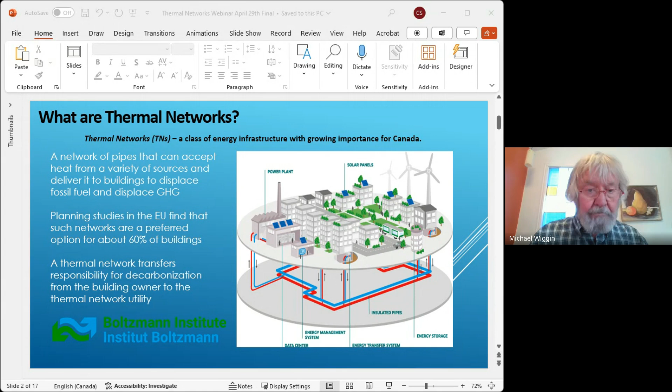Okay, thermal networks. Just a picture of them. These are quite different than the older steam systems done years ago, where they had to have tunnels underground for the steam pipes, things like this. Now with pre-insulated pipes, they're able to bury them only about 2 feet below the surface, about 60 centimeters. And the worry is structural protection. The heat loss isn't an issue.

The insulation's so good. So to cut into a road or a sidewalk and put these pipes down, they're usually above all the other utilities, water, sewer, and so forth. And so you can often go above other utilities and put them in without too much difficulty.

I showed a few pictures for smaller diameter, in fact, from about 100 millimeters and less. They're now supplying with PEX pipe, so corrosion isn't an issue, and they can supply them in rolls, as shown in the picture there. So places like Oujé-Bougoumou, a community I work with that's had district heating since about 1992, most of their piping is of this form, coils of PEX pipe installed by people within the community itself.

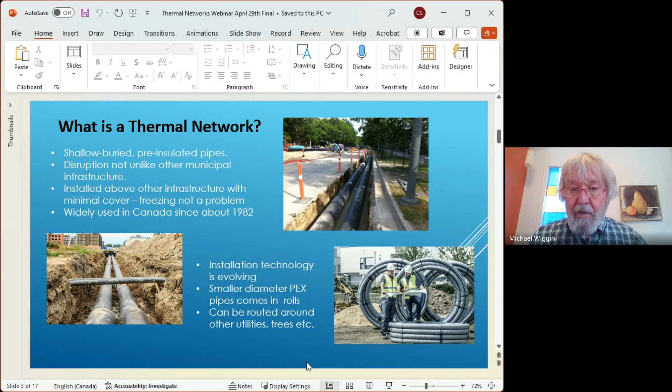Okay. Now, often we get into arguing details of one method versus another, but I think it's really important to come back and focus on our common ground. All of us, I think, are concerned about climate change. It's very evident now. All the climate scientists are behind it, and we are seeing the risk through forest fires, flooding, derechos, major storms, hurricanes. It's very evident we're on this path.

So now we've got challenges. We do have to reconcile these climate change concerns and the need to eliminate greenhouse gas emissions. And at the same time, we're talking, for economic reasons, about expanded fossil fuel production. The world still needs a lot, and so our economy benefits. Anyhow, we've got to reconcile that. We can't keep burning fossil fuel and mitigate climate change at the same time.

Now, the next thing I'd like you to think about is that when we talk of energy, everybody talks about the cost of making energy, whether it's solar or wind or anything. And they talk about the amount of energy used. Now, it's often easy to balance the seasonal output of solar collectors, let's say, with your seasonal heating demand. But what about the peak?

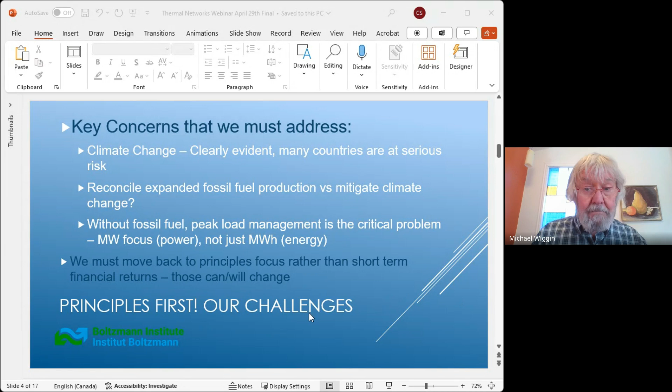Next. Yeah, okay. So as I said, I'm going to show you some of the stuff that me and my colleagues have been working on, but I mainly want to get some discussion so we can work together, all of us, on developing a common understanding of how to move forward. So I identified some of the major challenges, but now let's look at an integrated way of getting there.

Building heating, I'm going to focus on that because it's a really big issue. It's about 20% of our greenhouse gases nationally, and about 70% of the buildings that are doing these emissions are still going to be here in 2050. So while we are making a lot of progress on net zero passive house design for new buildings, we've got a lot of buildings that are here now and they're still going to be here in 2050.

The other thing is the rate of deployment of our housing retrofits is not really going to get us to this target. It's going slowly. And what people are finding is as you push beyond the initial reduction in greenhouse gas, the cost for existing buildings starts going up quite sharply. And then the other thing I said, some of our solutions are counterintuitive. As a building owner, the most obvious thing to do today might be to put in a heat pump.

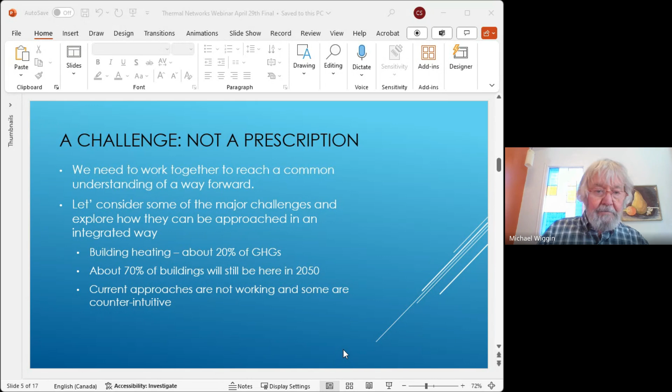Okay. If you're not familiar with it, I'm going to use load duration curves a bit in this presentation. If it doesn't make sense to you, imagine taking your hourly heat load during the year and look at a plot of hourly heat load, and then take those hourly heat loads and rank them from the highest to the lowest. And then you will get something called a load duration curve that looks like the blue curve.

So the peak is very, very high, but for a very short time, the 100% of peak, but it drops off very sharply. It's only that cold for a few days, number of hours. It drops off sharply, and then during the summer, obviously, the load drops to almost nothing. Now, that is not an easy thing to deal with.

When you have natural gas or oil, it's not so bad because the boilers are cheap and the fuel's available. We've got the infrastructure. So you turn on your furnace or boiler and meet the peak. But if you take away fossil fuel, it becomes a very different challenge, okay?

So the other thing I'd like to say is that if you switch over to heat pumps, this is a little debatable, so don't take me 100%, but basically the peak energy requirement for heat load and a resistance heater backup furnace is similar. So even though cold weather heat pumps are getting the COP up, the efficiency up during colder weather, their capacity drops. They have to make up the difference with gas or electricity. And if we're going to decarbonize, it'd be electricity.

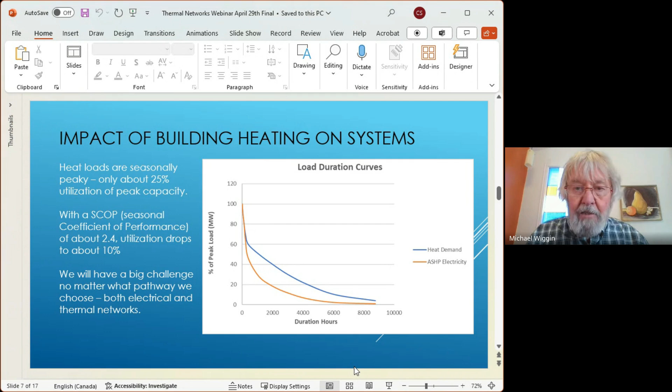So with this peak load issue for heating, as I showed you, it's very different than normal electric loads. If we're going to decarbonize the building sector, there are many sources of heat or electricity available, but they're variable, like weather dependent, solar or wind, or they're available when they're not needed, like industrial waste heat, solar heat in the summer, or heat from power plants. So there's always a big mismatch between the peak loads you've got and what's available.

So whether you go for a thermal system or an electric system, meeting peaks is going to be really, really difficult without storage. Now, if we look at storage options, they're making great advances in batteries, pumped storage, and everything. But thermal storage, I'll show you, is much cheaper, possibly about 1% of the cost, and it's been done at large scale around the world.

So generally then, producing heat is much cheaper than producing electricity, and storing heat is much cheaper than storing electricity. And technically, you can't store the electricity for very long periods in big amounts, but heat you can store seasonally, in fact, almost up to a year, and I'll show examples.

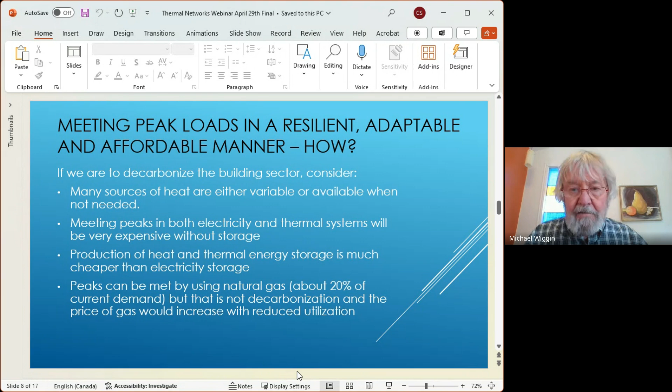Yeah, okay. Energy storage. If you look at that load duration curve, it's got a seasonal high peak. Now, for this example, if you go to about 40% of that peak and say I want to store the heat above that, it only amounts to about 15% of the annual energy load. So if you've got sources that'll give you 40%, there's many times a year when the load's less than that, and you can store surplus energy. So this is just a simplified example to show the impact storage has on reducing peak demand and making better utilization of the capacity we've got.

You can do variations on this if you've got intermittent sources or seasonally available sources like solar thermal, for example, that put out lots of heat in the summer, less in the winter. They can benefit from these concepts of thermal storage. Next.

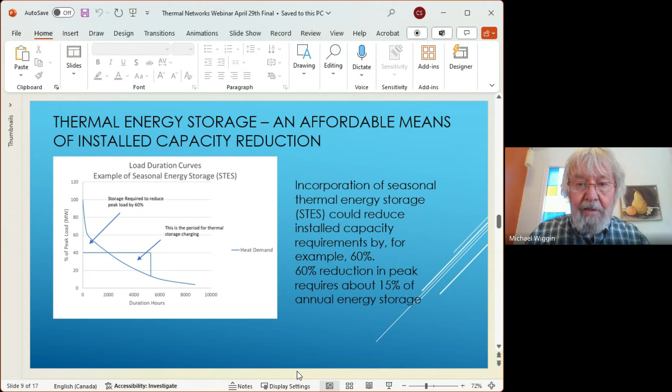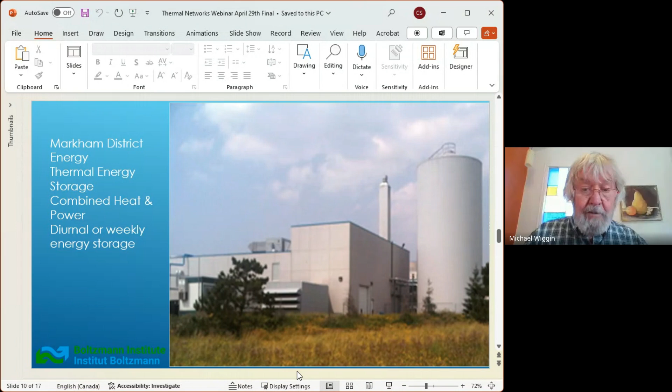Carla, next slide, please. Okay, here's one in Denmark where in the background you can see a big solar farm, and then they're able to store that heat in a pit. It's basically a deep pit, it might be about 15 meters deep. It's insulated on the sides, and it's got a floating insulated cap. It's called pit thermal energy storage, and there's quite a few of these around the country. Next slide, Carla.

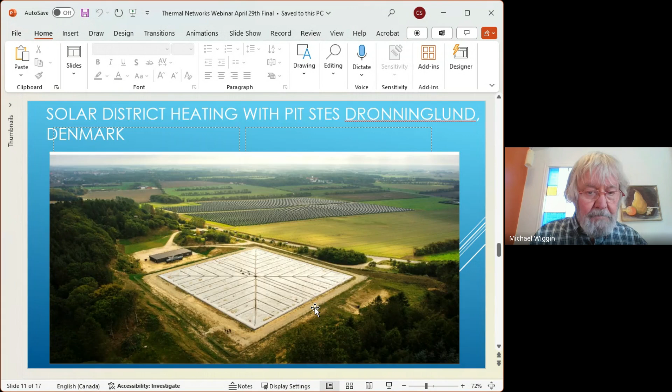A really interesting one recently is in Vantaa, Finland. They built specifically for thermal storage some large underground caverns, about 100 meters underground, 1.1 million cubic meters, and it can store heat up to about 140 degrees C because of the pressure. And it can provide over 90 gigawatt hours of heat. That's enough to heat some smaller cities for a year, okay? And compared to the same amount of energy stored as electricity in car batteries, it'd be about 1.3 million car batteries equivalent at about 1% of the cost, okay?

Now, I'm dealing with China right now, and they've got one double the size, 180 gigawatt hours of thermal storage. And it turns out quite economical. Next slide, please, Carla.

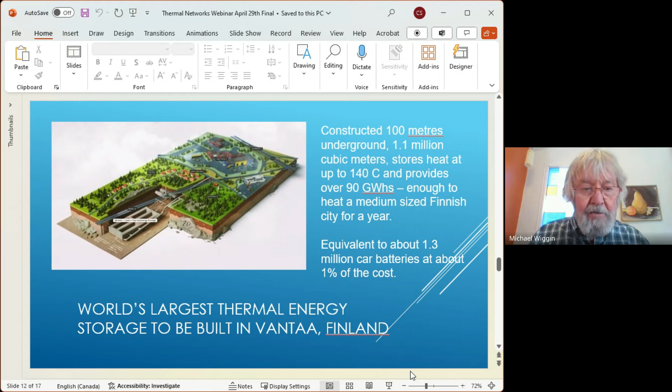I should mention there's some other developments like Canadian developments. You may have heard of Drake Landing out in Okotoks, Alberta. They had a smaller thermal storage with boreholes, drilling boreholes in the ground, putting the heat down there, storing it in the ground, taking it back in the winter. And they could meet 90% of the heating load with the solar collectors. Now, this was a relatively small one, but they're building bigger ones that are more efficient.

And they've even got technology now where they can go into an underground parking lot and drill holes below that and store heat below existing parking lots. Yeah. Sorry, there's an oversight. I forgot a photograph of that. Now, coming back to this, there's some work done by my colleague Martin.

The blue line, if you look at the left diagram, shows existing electricity load over 2 years for the Ontario electricity system. And then on top of that, we looked at what the additional heat load would look like if it was resistance heating. So the extreme left diagram shows 2 seasons showing the existing electric load and what it would look like if you added on electric heating for the heating.

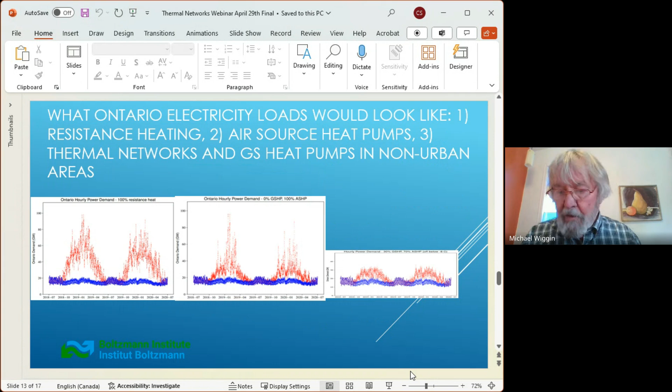We have had some recent work that will be released soon that shows that the electricity price, if you had to meet the heating load with heat pumps, might go up in the order of 250%. I'll come back to that one. Okay, next, Carla.

I just thought I'd show this other one that would have been better beside the others, but if you use gas for peaking, you can bring down your impact on the electric grid quite substantially, bringing it down from about 70 gigawatts to about 35, but the utility would only sell about 20% of the gas they're selling now for heating buildings.

So you ask yourself, if the electricity company's got to boost their capacity and the gas company's losing revenue and has to pay for infrastructure, they're probably going to have to start increasing gas prices as well. Anyhow, it's a complex issue and we need everybody to start thinking about it. Carla, next slide, please. Okay.

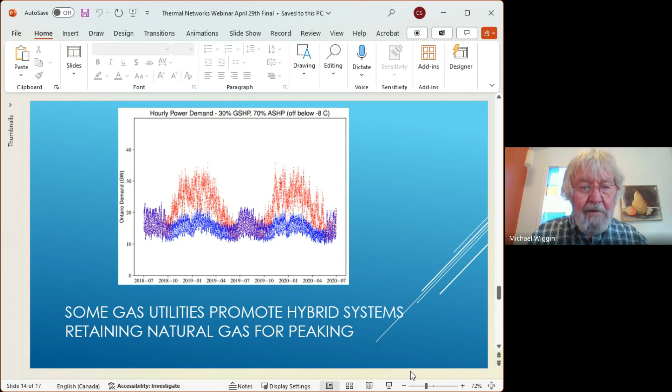One of the general things I thought I'd pass on is the Swedish Heating Academy. They developed this philosophy. It's called 3 C's. One, we all want to conserve energy. Don't think I'm trying to replace being efficient with other sources of energy. But as you try and reduce the building consumption, too much gets expensive. So look at what's reasonable for lowering energy demand and lowering the temperature required to heat buildings. So conservation is the very first thing. So we're all on side there.

The next was connecting to a thermal network, just like we used to connect to a gas network or connect to an electric network, connect to a thermal network. Even if in the short term it might be using gas or whatever to supply that network, once you're connected to the network there's much more possibility for finding decarbonized sources.

Also, it saves you a lot of headaches of looking for how to get deep retrofits, how to change your electric panels, put in heat pumps and everything, so it transfers responsibility to the thermal utility, and the thermal utility on your behalf can find decarbonized sources and also get economies of scale and storage to get much higher levels of load management. And then the last thing, of course, is to convert those network sources to decarbonized sources.

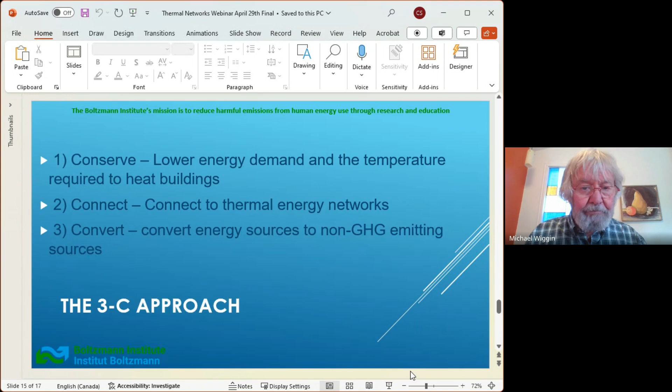Okay, so in our work, I'll just say something about what's happening now. Based on trying to promote and discuss these ideas, the Boltzmann Institute got a contribution of about $750,000. This was through the Net Zero Advisory Board, and it's given to us by Environment and Climate Change Canada. And we are comparing an electrification pathway with a thermal network pathway where feasible.

And this report should be complete in about a month, and it'll be circulated to all the local distribution companies in Ontario and be available. And what it's showing basically is that when you take into account full cost accounting, the electrification option is considerably more expensive than the thermal network option.

Within the Ontario Society of Professional Engineers, they've been looking at priority areas for investigation and advocacy, and they've identified thermal network strategy as one of their priority topics for 2024 and again for 2025. We've been working with the Nuclear Association Advisors, McMaster University, and others, looking at issues like nuclear CHP. And that's been a very interesting one because it's happening around the world.